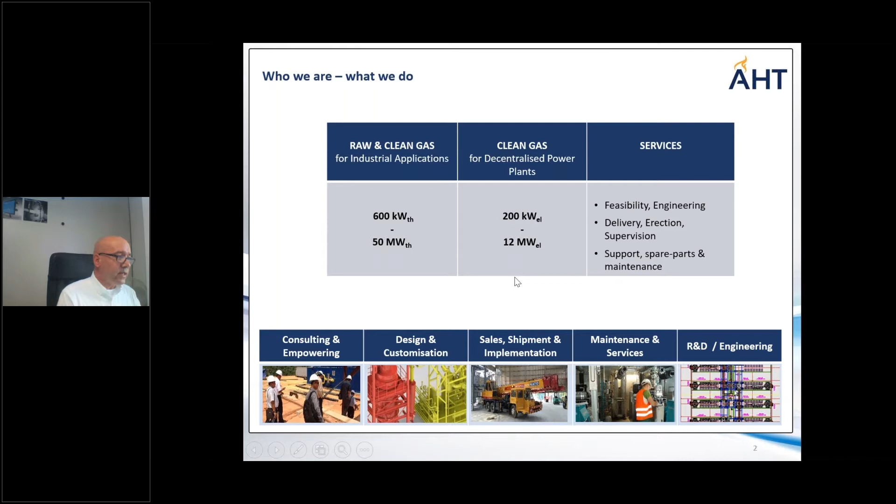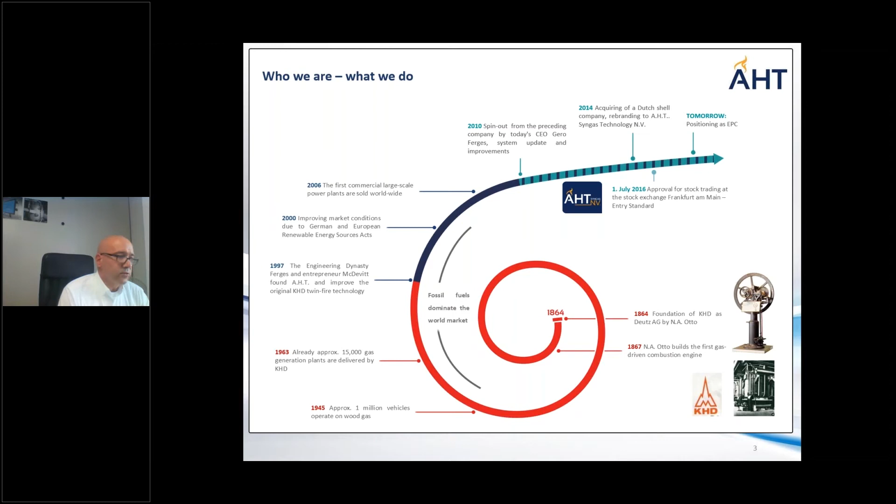Thank you. A short glimpse on our history. We actually stem from Klöckner-Humboldt-Deutz, which invented the so-called twin fire gasification principle. The father of our CEO, our owner, took the technology after AHT was dissolved. We basically spun ourselves off from the original AHT and translated the technology to the demands of the current century.

Thank you. This is what a typical setup could look like. So the centerpiece is the so-called twin fire gasifier, what that means I will explain a little bit later. We apply a gas cleaning system, in this case a wet gas cleaning system, as we can purify the gas to the best possible extent so that you can either use syngas constituents or use it with turbocharged high-efficient gensets or CHPs. The water is circulated, so we clean it up and put it actually back to the production cycle.

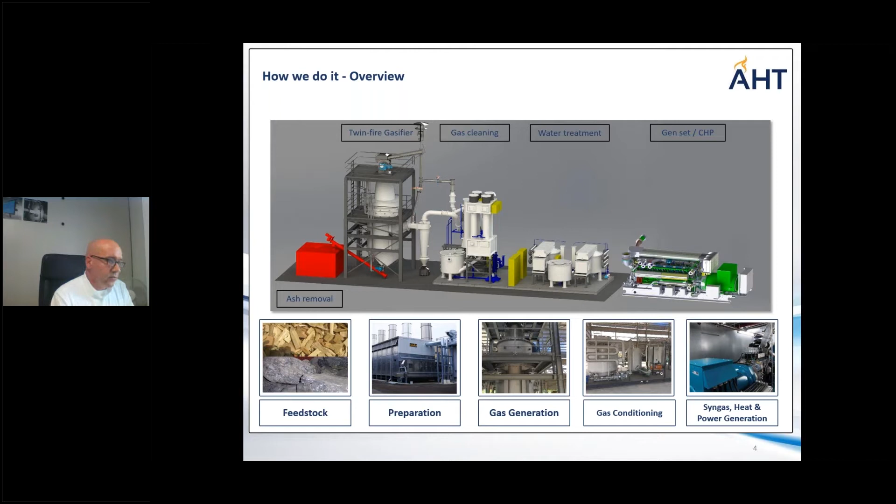Next slide, please. So this is what actually twin fire means. In fixed bed gasification, there are two types of gasifiers: the so-called updraft gasifiers, where the gas flows against the biomass flow, and the syngas is stripped off in the upper part of the gasifier. So you have a quite high tar content because it goes through the ungasified part of the gasifier, but at least a low ash content. The downdraft gasifier does it the other way around, and this way you have a low tar content but a high ash content, as the syngas is stripped off near the ash zone. So what we do is combine both - we have an updraft and a downdraft, a co- and counter-current flow, and the syngas is stripped off in the lower middle part of the gasifier. This way we have a low tar content and a low ash content, and the material is completely gasified so that we only entrain pure ash. This is also important because we also address waste reduction. Next slide, please.

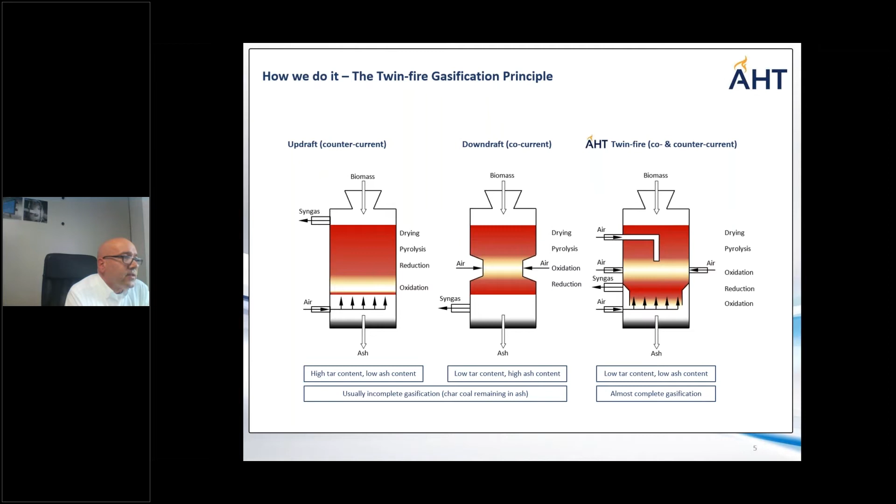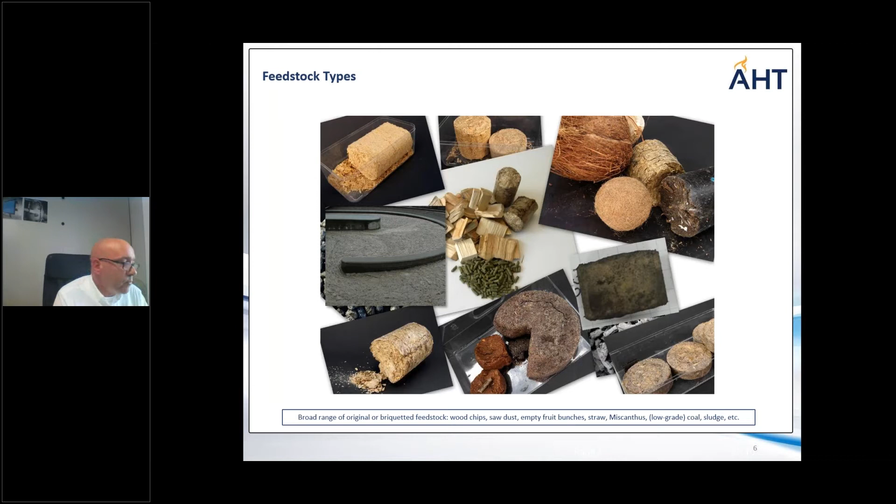So here you can see what types of feedstock we like. Basically we need a coarse structure, so in the easiest case these would be wood chips, but we can also use harvest materials in briquetted form - this is, for example, of interest for the palm oil industries. And we can also use sewage sludge, by applying hydrothermal carbonization. This turns any high liquid biomass, also sewage sludge, or manure or digestates from biogas plants, into a hydrochar. This hydrochar can be gasified, but it can also be used as a soil improver.

A relatively new project of ours is the hydrogen separation from syngas. It is an advantage that we already have hydrogen in the syngas, up to 15, up to 30%, depending on the technology, so we only need to separate it. This means we need considerably low energy, and we can actually generate the hydrogen where it is needed. Next slide, please.

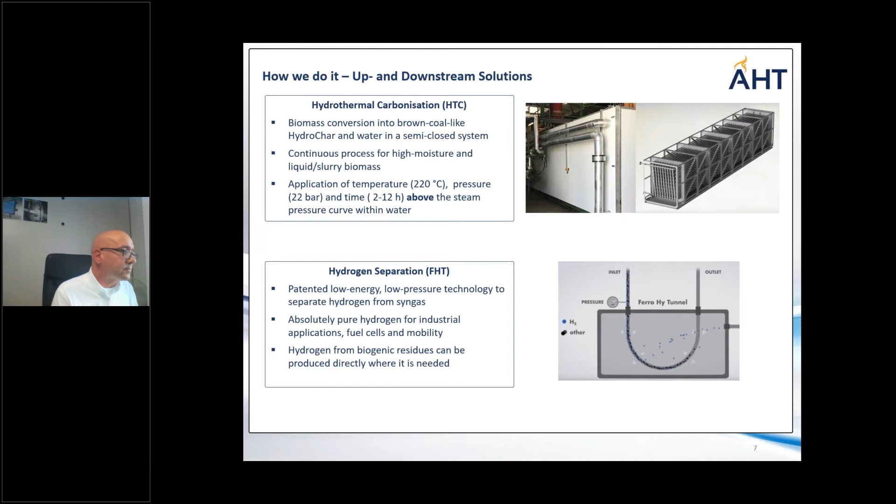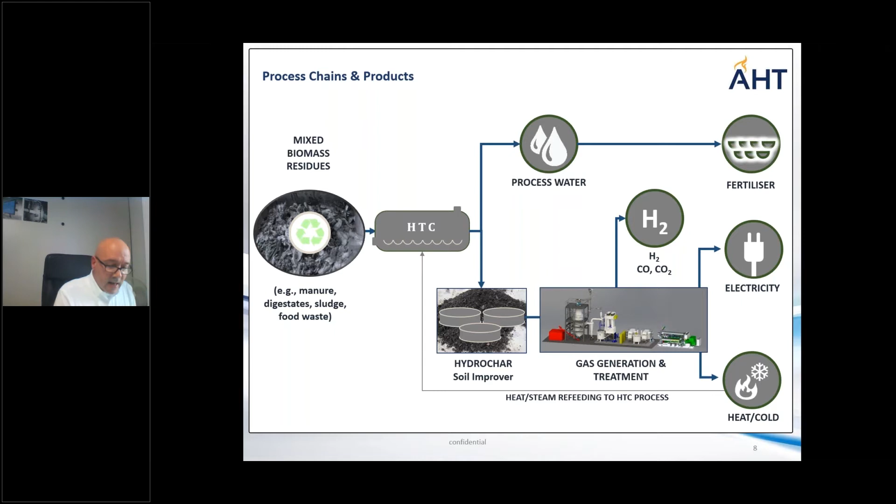Then, of course, we have the opportunities to separate the hydrogen. We can separate CO, we can separate carbon dioxide - these are of interest for chemical industries. And of course, we can generate electricity and heat, and from that heat, of course, cold.

So to whom do we offer? The center is smart cities. We already heard today that there is an issue with volatile energy carriers like wind and solar. Our plants are a perfect completion, because we deliver baseload energy, and our plants can also go down with the output or go up again, depending on how the other energy carriers behave. As I said, we target chemical industries in need of a clean syngas.

Wood processing industries, farmers, cooperatives, production and manufacturing who need high process temperatures and process heat. Food and beverage industries bring their own waste, so they can practically have no expenditures anymore for heat. Also important in Indonesia, independent power producers, and sewage sludge plants who also want to have a CO2 neutral and energy neutral energy balance.

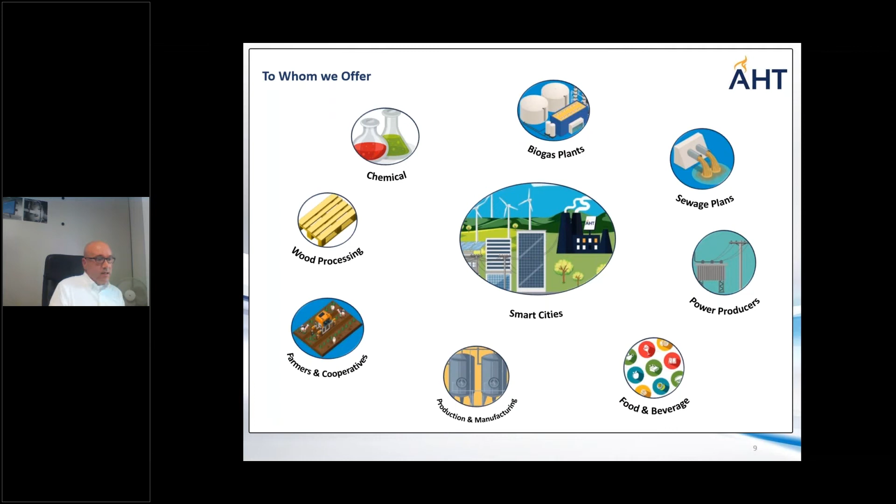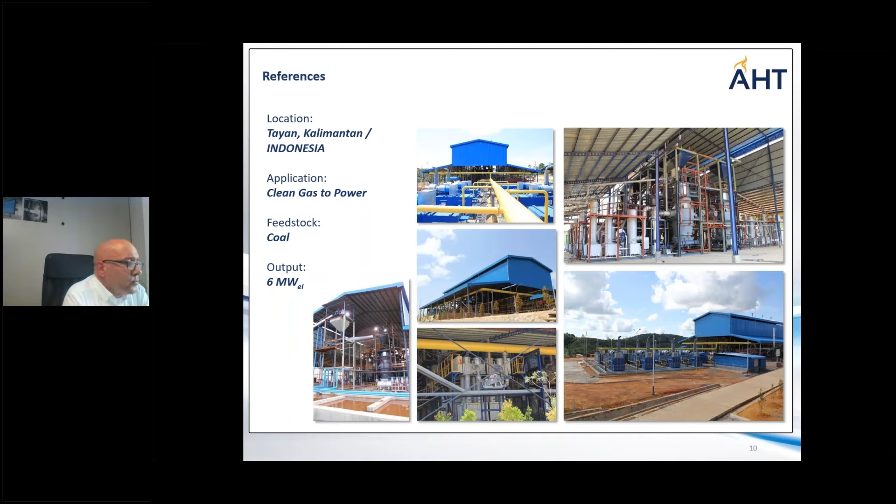We are already in the market. We had two projects. One of these projects was in Tayan, Kalimantan - a coal-fired power plant at that time, and the output was 6 megawatt electrical.

This is an example of an industrial application. It was also fired with low rank coal here. Output was 40 megawatt thermal, and it was used to produce iron ore pellets.

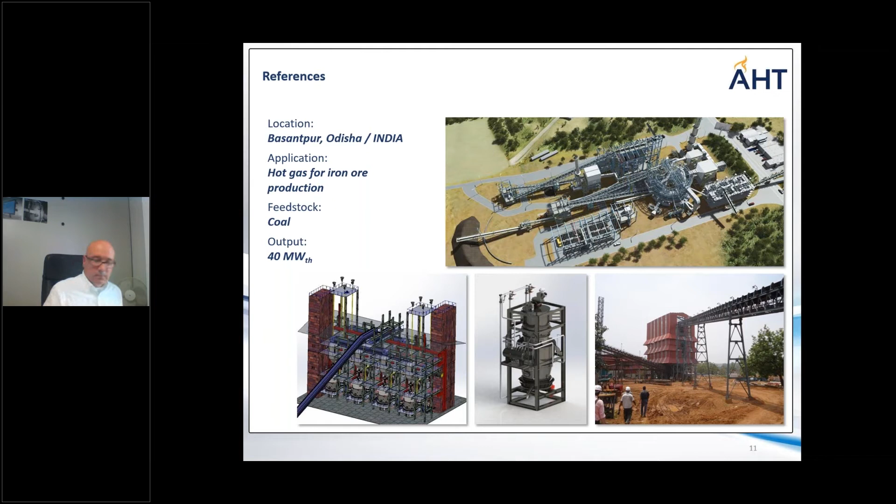This is one of our latest projects and references. It's located in Switzerland, and it combines the hydrothermal carbonization with clean gas heat and power generation. We are in the midst of commissioning this plant. Unfortunately, due to the pandemic, we could not travel, but now the works have resumed.

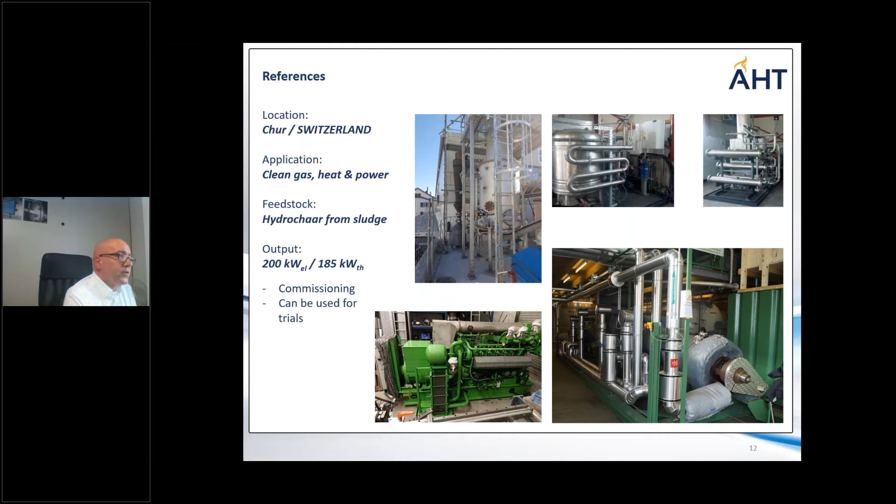This is an example we installed last year. It was a pilot plant, 150 kW, and it was also a hydrochar plant. The owner of this plant produced, by his own developed technology, a kind of hydrochar.

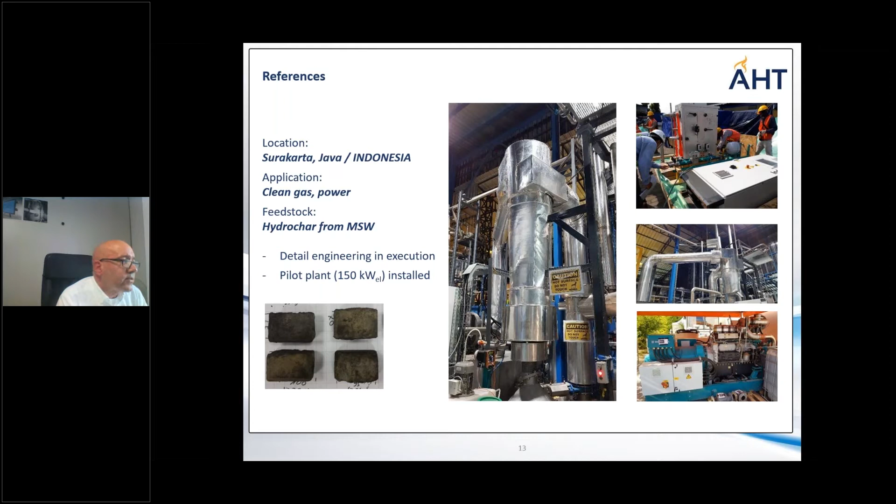This is an example of a grid-connected installation in Japan. It runs flawlessly since 2015, and 800 kW electrical are produced and given to the grid, serving 2,000 households. If you look at the picture on the left-hand side, you can see a hotel above the plant - so it's in direct vicinity, which shows how clean such a plant actually works. There is no noise, there is no odor, otherwise the hotel obviously would not exist anymore.

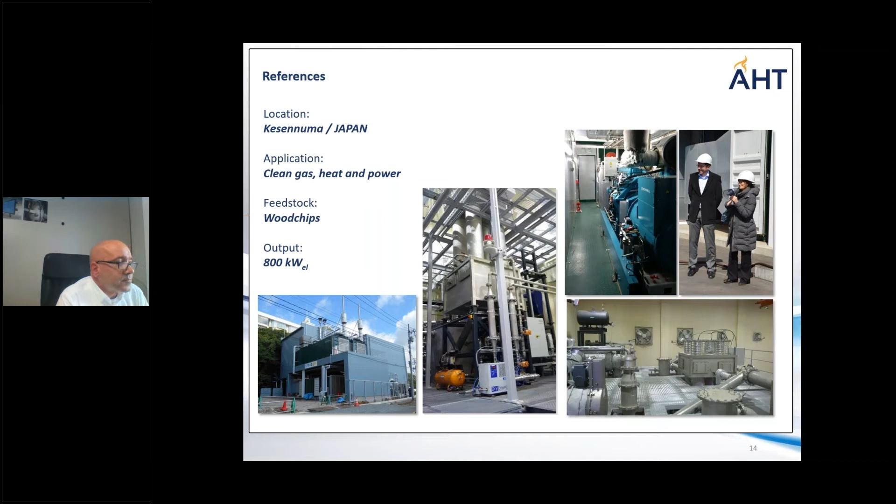Can you check under audio whether the audio is working? Your audio settings perhaps have to be activated. In the menu you see audio, maybe just check if it's on no audio. Okay, maybe try switching off the camera, that might help. Try switching off and on the microphone once, maybe that helps already, because if I do it, it seems not working. Let's see now.

Can we switch to other, and then we can have Mr. Gunther back. Can you hear me? Yeah, now, no? Yes, very good. Yes, now we can hear you. I have restarted the system and now it seems to work. Sorry for that problem, but at the beginning it was working.

We are located in the south of Germany, also in Wiesloch, around 80 to 100 kilometers south of Frankfurt. So my slide moving is also not working, maybe someone can move my slides. Stefan? So we are located in the south of Germany, also in Wiesloch, it's around 80 to 100 kilometers south of Frankfurt. So next, please.

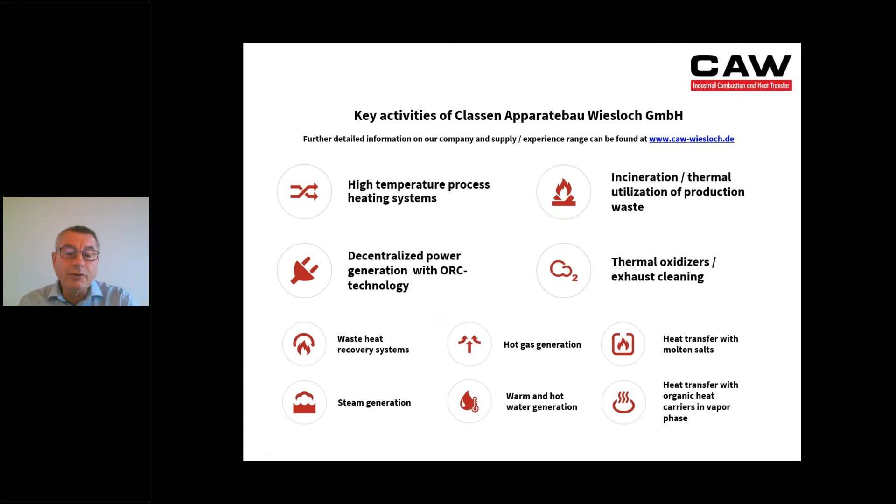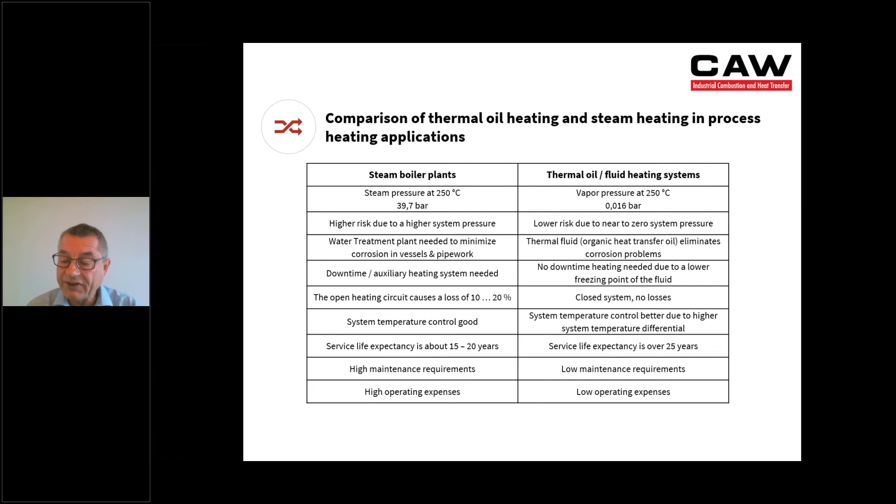Our key activities are manufacturing and supply of high temperature process heating systems, typically for process heating at high temperatures. If we are talking about high temperature, we are talking about temperatures above 150 to 300 degrees. Also above 300 degrees, process heating is possible with special fluids and molten salt possibilities. The benefit of such a thermal heating system is that we can operate at high temperatures up to 300 degrees without any pressure inside the system. For example, if we have a system temperature of 250 degrees, we would have in steam systems around 40 bars, and the thermal heating system is still working without pressure.

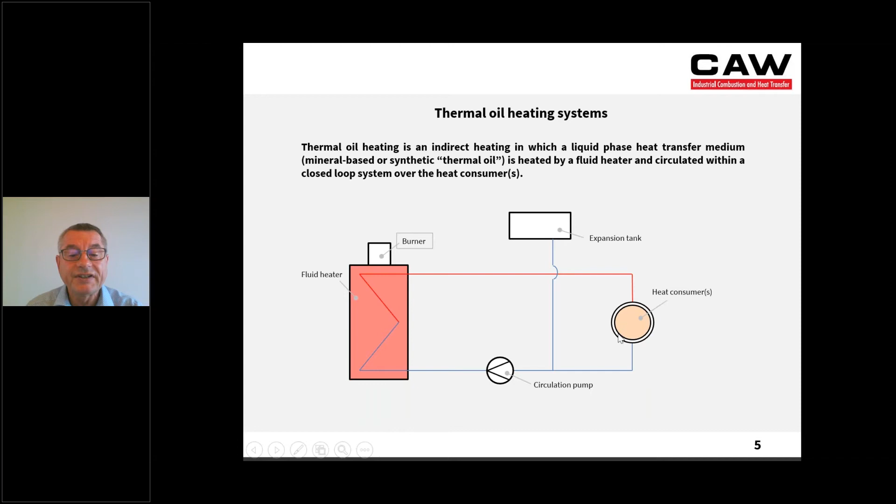So next slide, please. This is a principal drawing of such an indirect heating system. We have at the left side the thermal heater, which is fired by means of a burner, or it can also be used with a biomass firing system. We have a pump below, which pumps through the circuit. We have the expansion system and the heat consuming system.

Next slide please. As fuel, we typically use for the simple systems fossil fuels like natural gas, light fuel oil, or also heavy fuel oil. Typically, if we talk about efficiency, we combine this with so-called economizers, which use the energy of the flue gases to give it back to the combustion air and achieve highest efficiencies up to 96% efficiency. We also heat up our systems with biomass, with grate firing systems, and also with production waste like liquid fuels, gaseous fuels is possible depending on the process, which is coming from the process, and also electrical heating is possible.

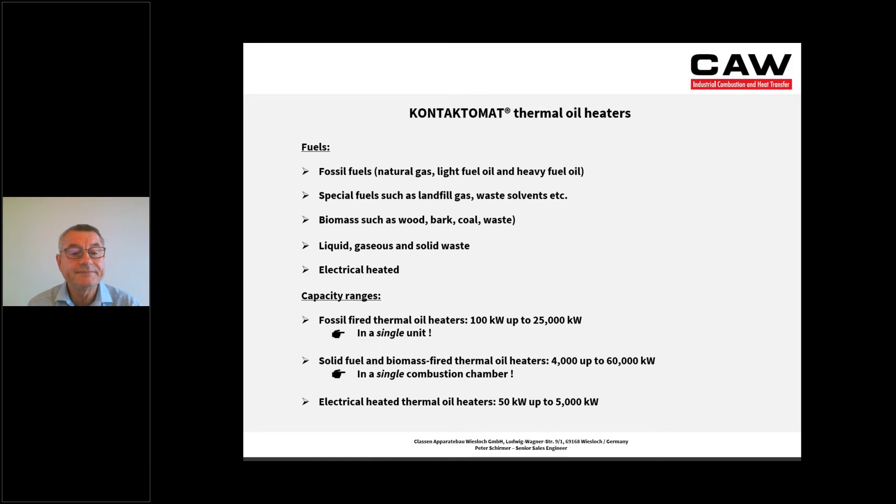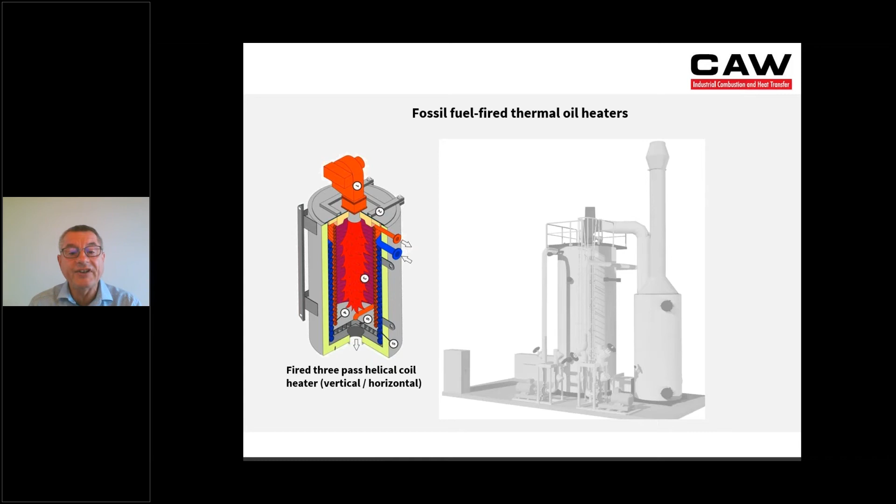Next slide please. Here, the left side is such a direct fired thermal heater with a burner on the top, and we can see in the middle of this heater such a tube coil, which forms the combustion chamber. At the right side, we have such a heater combined with an economizer.

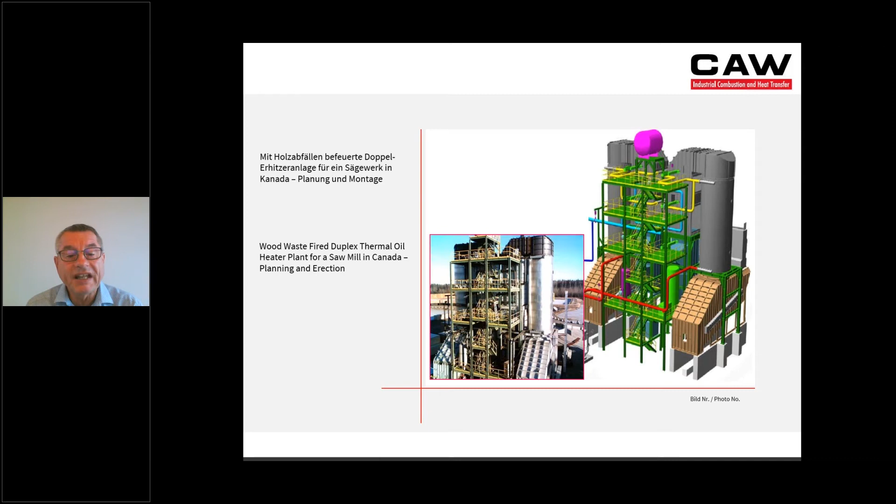Next slide please. This is a heat exchanger showing - this was a heat exchanger, which is installed in our biomass firing systems to extract the heat from the flue gases. Here you can see a biomass firing system in a sawmill in Canada, from the pre-planning and then after erection.

Next slide please. This is this heat exchanger, which is installed in such biomass heating systems. The benefit of such a bare tube heat exchanger is that it can be cleaned very easily, for example, by a shot cleaning system.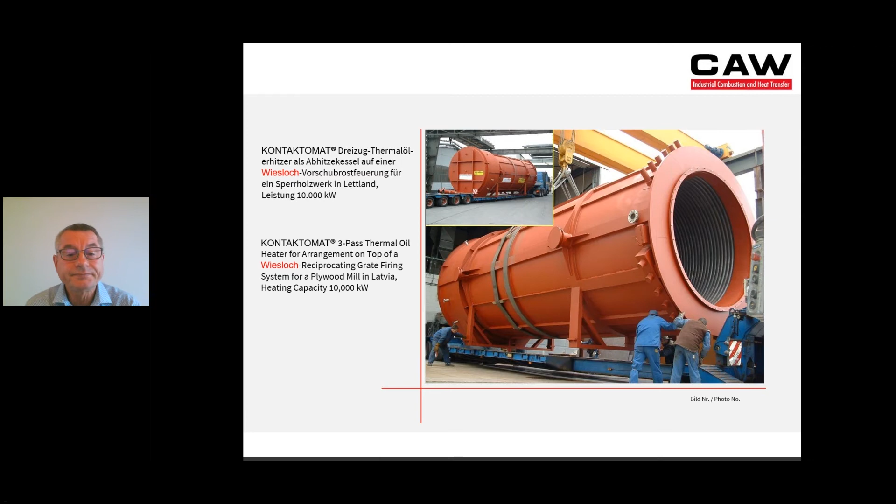Next slide please. This is a small direct fired thermal heater in combination with indirect steam generation. The benefit is that we have such an indirect steam generator, which is not fired. It's handled from official side only as a pressure vessel, so there is no need by law to operate this as a steam generator because it's only a pressure vessel.

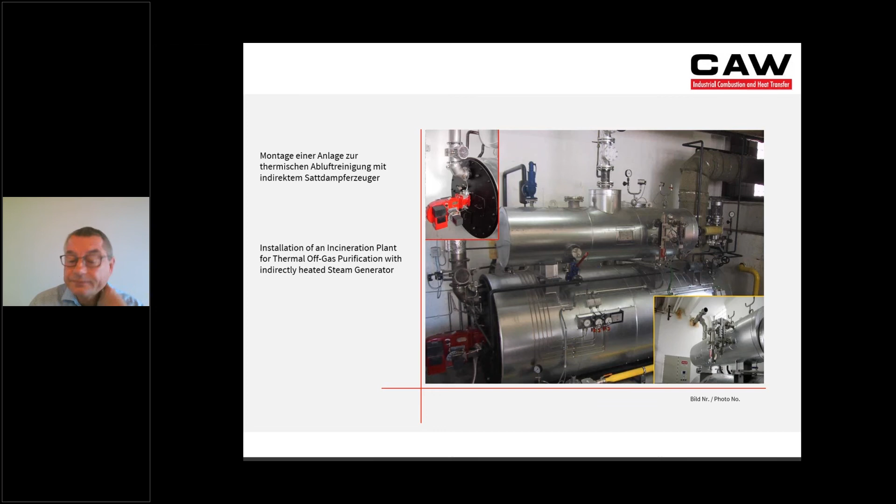Next slide please, one minute to go Mr. Gunther. Yep. Here's some references, and we can see here the left side heater with highest efficiency and lowest NOx emissions. Next slide please.

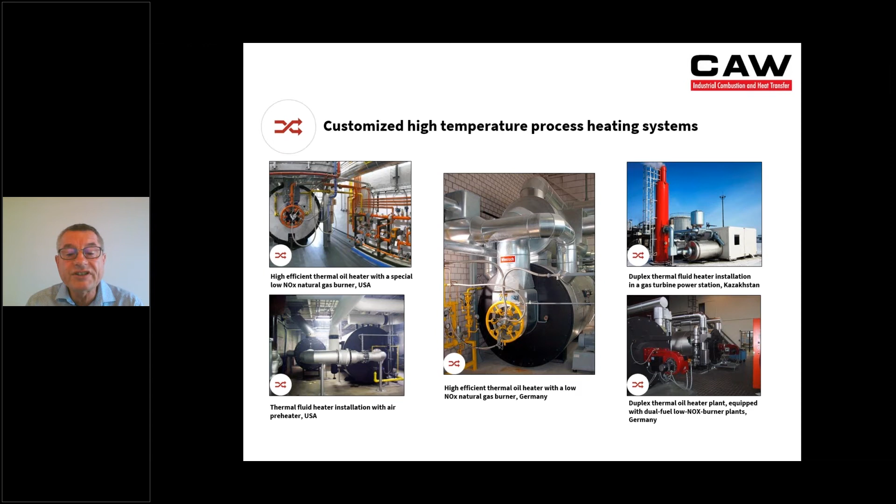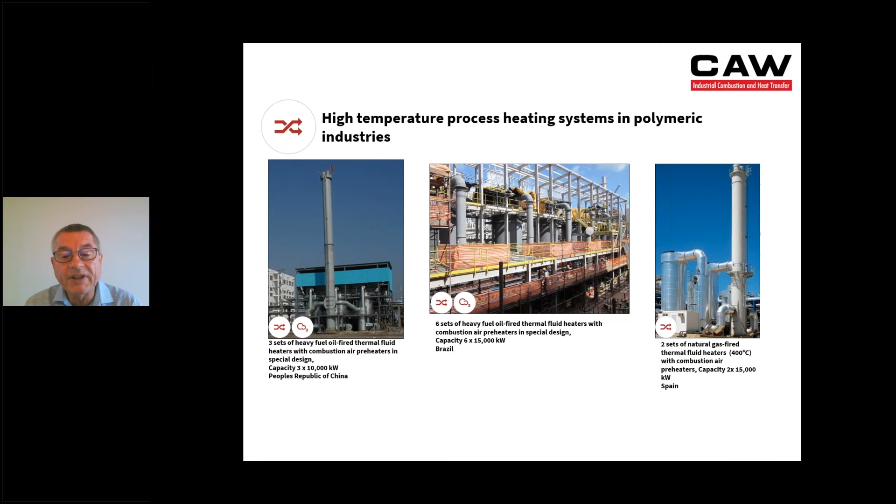Example of installations with air preheating. The left side is installed in China for a PET plant, and the right picture is a power plant, solar power plant in Spain, it's operated for 400 degrees. And here we have some references in refineries where we use refinery gas and residues from the refinery to generate heat. Next slide please.

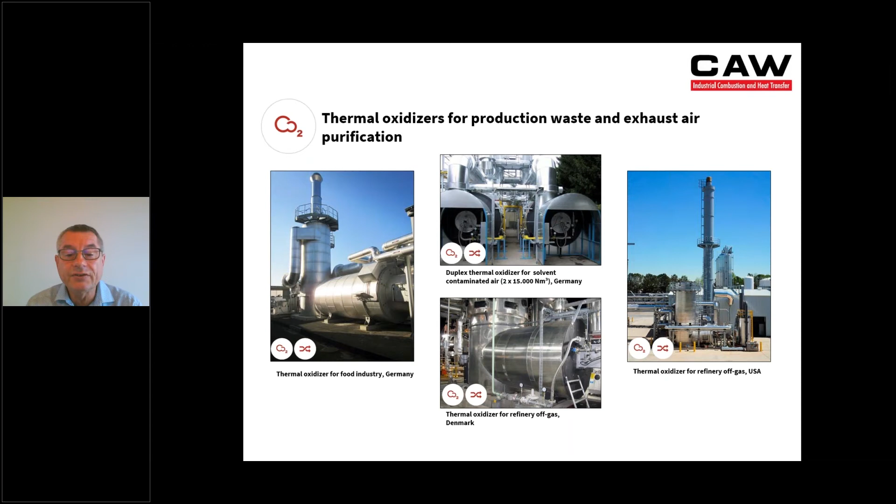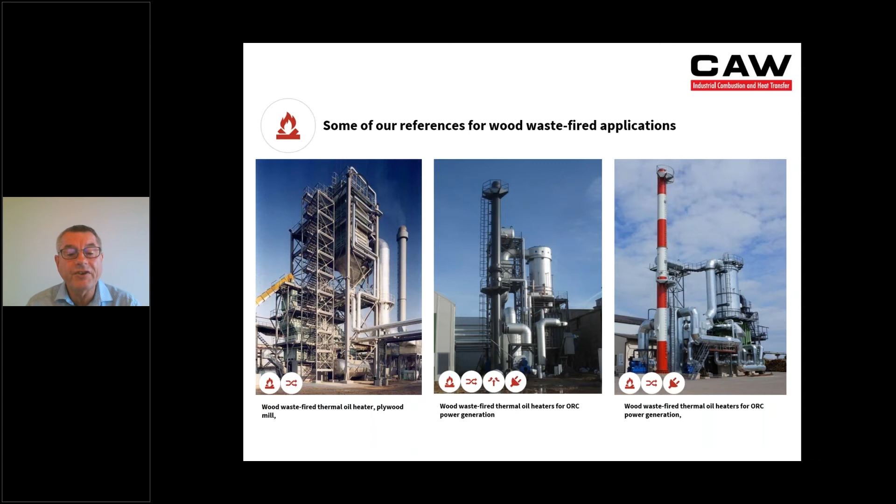Some biomass installations in combination with power generation, with ORC power generation. Next slide, please.

Thank you very much for your attention, and I wish you an interesting conference.

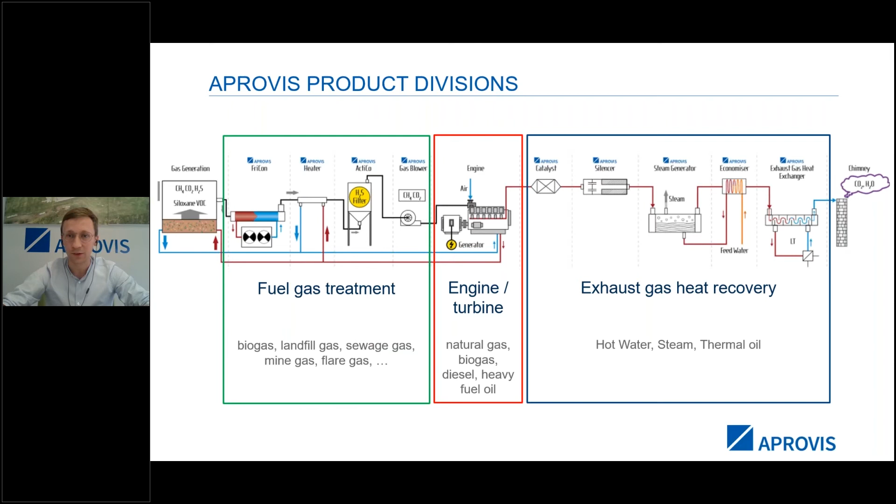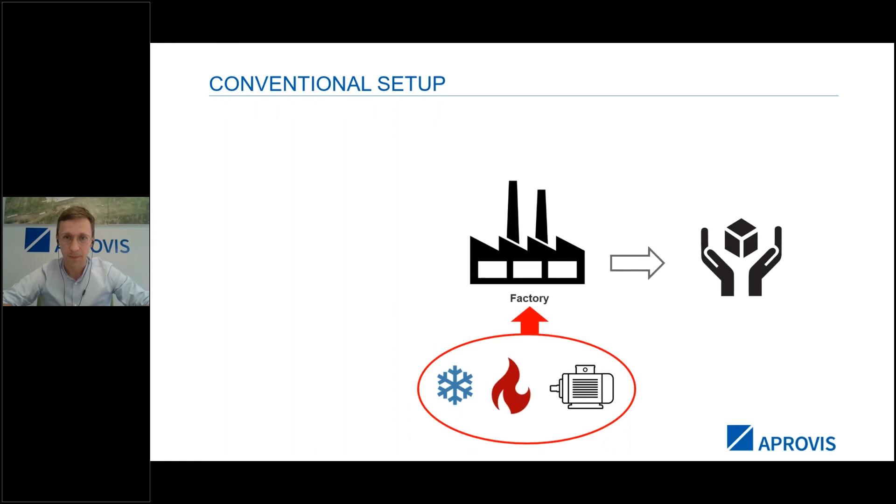So we will focus with the next slides on this energy efficiency setup with CHP. But before that, I would simply show you the conventional setup so we are all on the same picture. We take the example of a factory producing a certain product. To produce this product we need electricity to run pumps and conveyor belts, cooling power to cool the factory or the product, or thermal power, as we heard before, for a thermal boiler or thermal circuit like hot water, thermal oil, or steam.

For that, in a conventional setup, we have electricity coming from the PLN electricity line, and a gas supply—or it can also be coal, any kind of fuel—to actually run the heat source, the steam boiler or the thermal oil boiler.

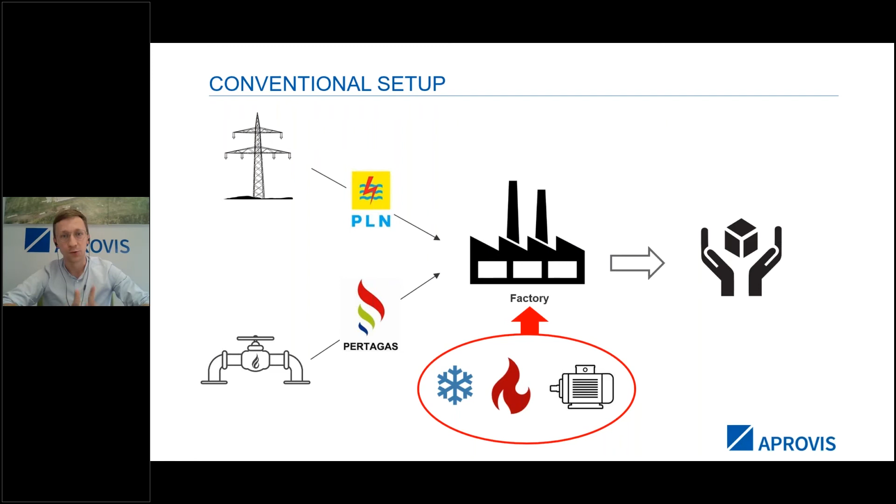Now compared with the CHP setup on the next slide, we see a combination. We still have the same factory with the same output of a certain product, which is the focus of everything. But now we have a combination using a gas engine or gas turbine, producing electricity, shown here in the yellow arrow on top. Then at the same time, out of the heat recovery, we can produce cooling power, steam at a certain pressure level, or heat to support the existing heating circuit with thermal oil or hot water. It can also be incremental power—if we talk about pure electricity production, even the exhaust gas heat or waste heat can be utilized to increase the overall electric production.

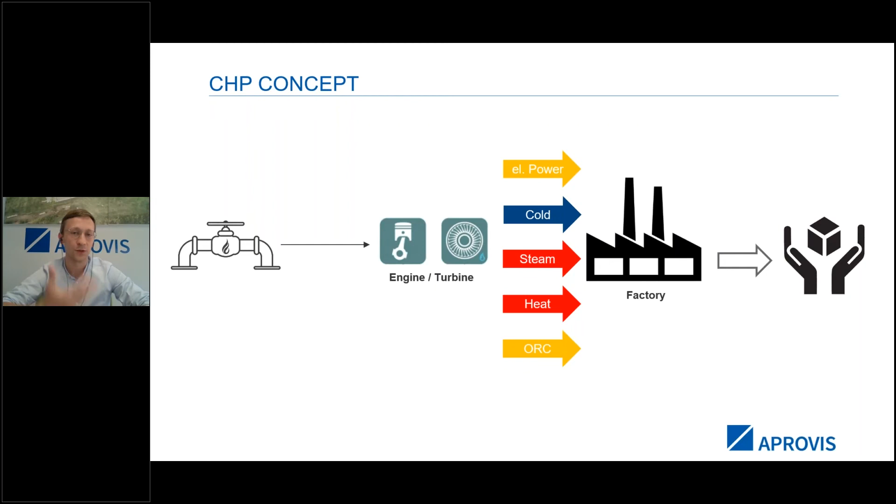So all these options are on the table. We are an equipment supplier, so I'm simply showing you what is possible, not that we have all this in our scope of supply, but we can assist you to evaluate what is suitable for your approach, your project, or your plant, guide you through the beginning of this evaluation, and in the end serve with our equipment, which has proven itself worldwide in several cases. Next slide, please.

Again, now the CHP example in reality, a simple one. To round up the picture, we see the example of a gas engine, a certain size, let's say 1 megawatt or 2 megawatt. This gas engine is usually running on natural gas and producing electric power to supply to the factory.

We have hot exhaust gas coming out of this gas engine, and it could be dumped directly to the environment. But we are here to learn about energy efficiency, and state-of-the-art proven technology in Europe, America, and Australia is actually to utilize this exhaust gas heat in simple equipment like a heat exchanger, no additional firing necessary. From this exhaust gas, in combination maybe with jacket water coming from the gas engine, there are several waste heat sources to take this waste heat and produce, from the same original fuel source, additional hot water.

If we talk about glove production, which has risen by 600% now due to the COVID situation worldwide, the glove production needs hot water at a certain level, 140 degrees. We can provide that with this kind of equipment and at least support the existing system. Why are we doing this? Because the energy bill will be lowered. We can substitute a certain amount of hot water with this system. So it's a combination of heat and electric power, and it can also be cooling power, whatever is needed.

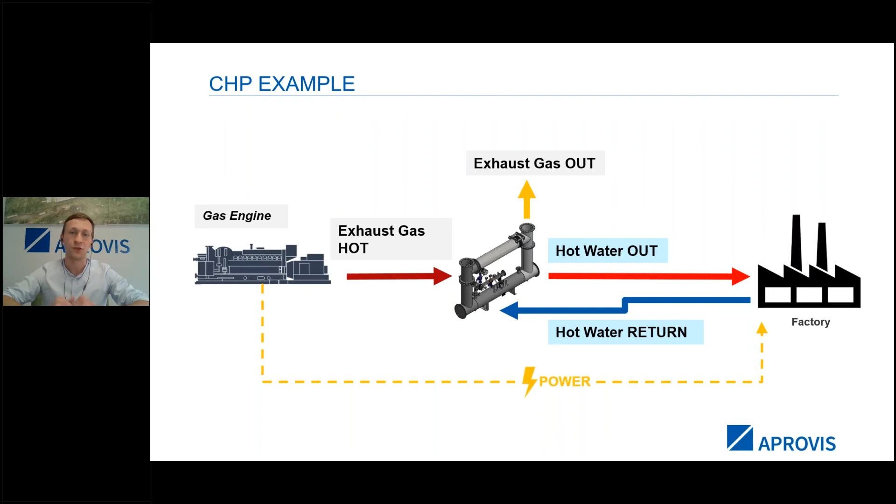The motivation behind this, why energy efficiency is shown in this table, where we see the standard energy efficiency, the general efficiency ratio for certain types of power plants. We have the typical thermal power plant up to 40% electric efficiency, meaning 60% of the initial fuel going to that plant is dumped to the environment. Gas engine generators come already with 40 to 50%. Now we talk about energy efficiency measures we take additionally, like the combined cycle, to raise that percentage further.

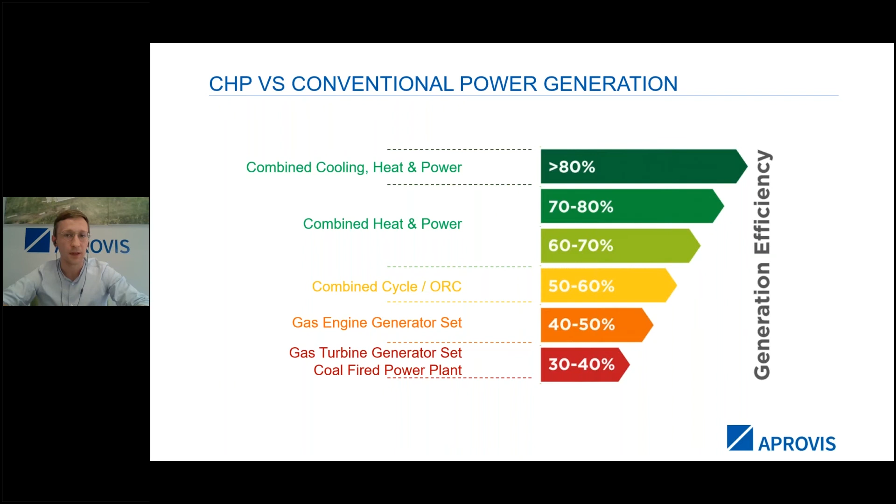Or if we want to reach the really green zone, the higher level of 60, 70, 80%, we need to talk about combined heat and power, CHP. This is what is behind this table, to have a broad picture of where we end up with efficiency, to simply get more out of the fuel that you have to pay for on a yearly or daily basis. Next one, please.

To summarize the product range: as I mentioned, gas processing and gas heat exchangers is what we have for the green production, for the biogas production. We have the emission control equipment and steam generators, but purely the heat recovery solution, not the direct fired one. Same for the exhaust gas heat exchangers.

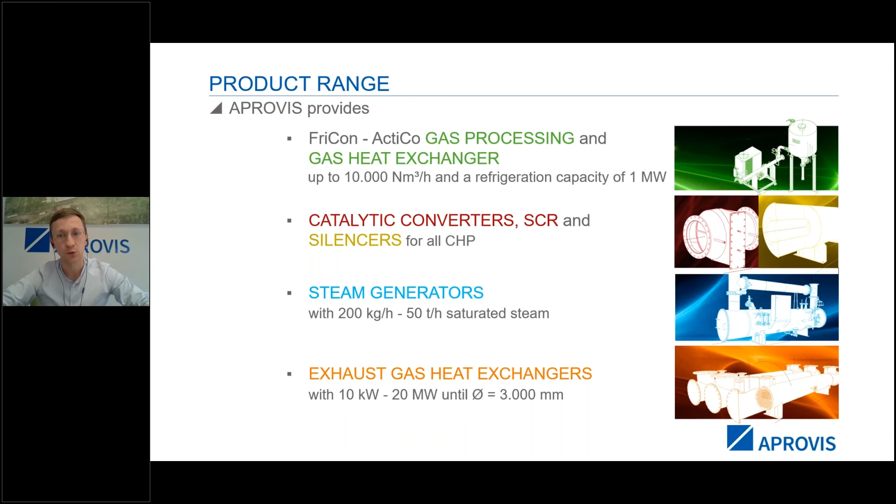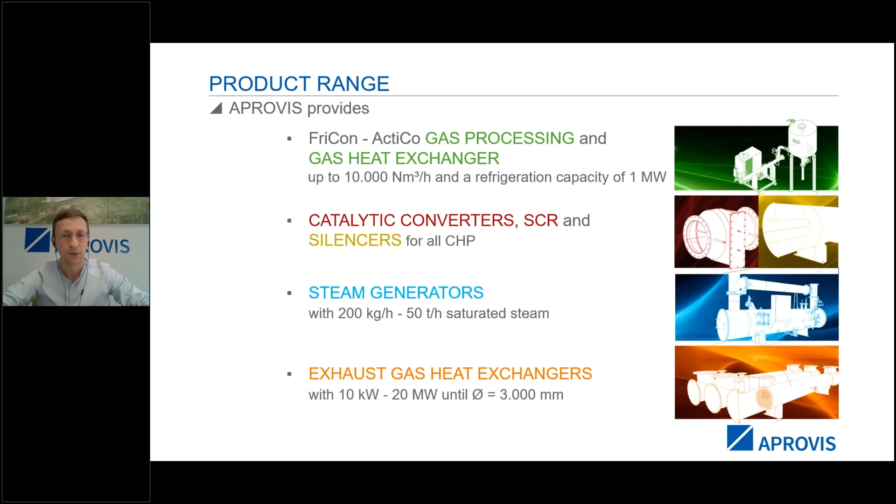What I would like to convey is a message: whenever you have a gas engine or gas turbine project as an IPP, an EPC, or engine distributors, these are our partners to work together with, to sort out the most efficient setup and the best setup in terms of capex for the project. So we help with ROI calculation, we help to get a nice broad picture of the project, and then connect with certain partners to move on. Next one, please.

With that, we have worked together for years with all the big names in engines, from engine manufacturers. You see Rolls-Royce, Wärtsilä, Jenbacher for sure, MTU, MWM, Caterpillar, all these brands. We have a close relationship and supply directly to these engine manufacturers as an OEM supplier.

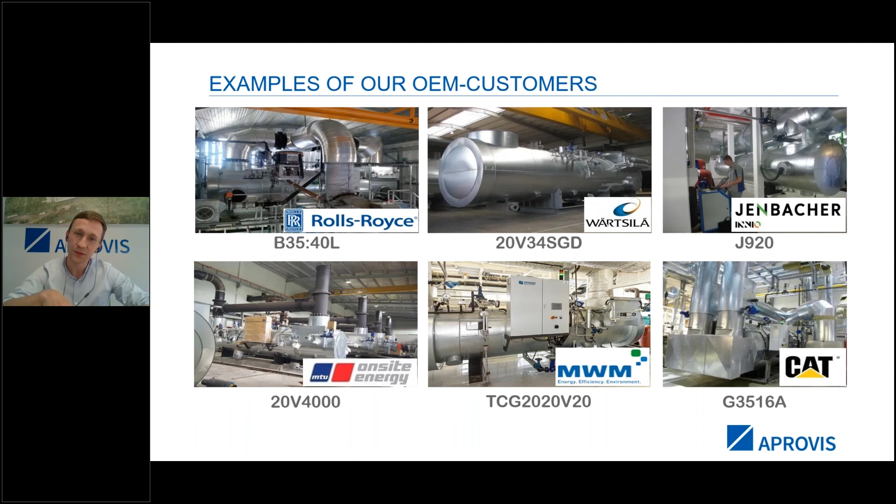Also, after-sales is managed from here. So we are close, and please contact us for any inquiry. And with that, I would like to hand over to the last presentation. Thank you very much.

Thank you, Niels. It's an overall picture of your capability and product lines, and hopefully it is going to grow faster in Indonesia.

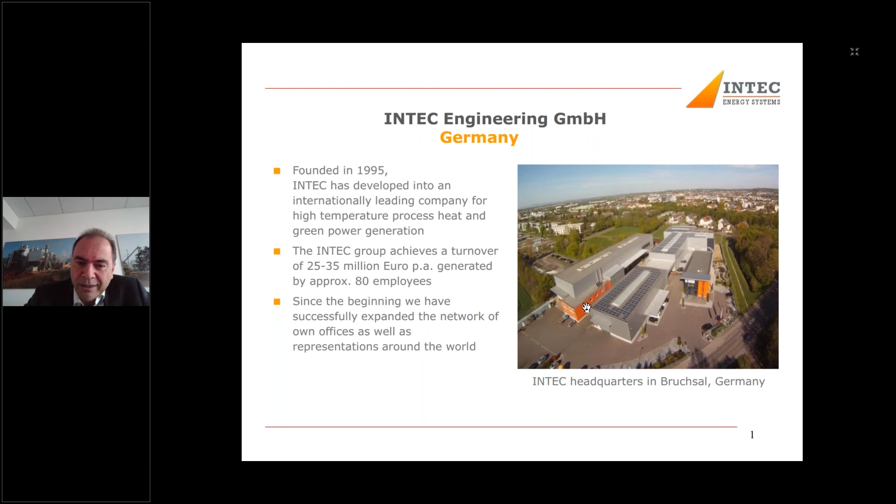Our business is to provide complete solutions from heat to power. It's a quite big range of many different products, and beyond this, from heat to power solutions, which we will see later in more detail. We are also offering the opportunity for sludge drying. This is getting more important in Europe, the opportunity to dry and incinerate sewage sludge from water treatment.

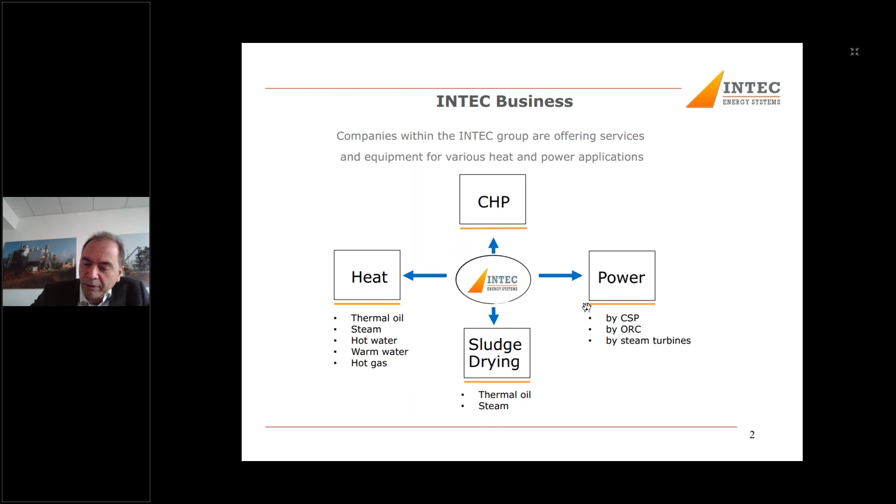INTEC has been working worldwide for a long time, so we have many installations around the world, several with thermal energy supply, and we have participated in many power generation projects across the world, mainly in Southeast Asia.

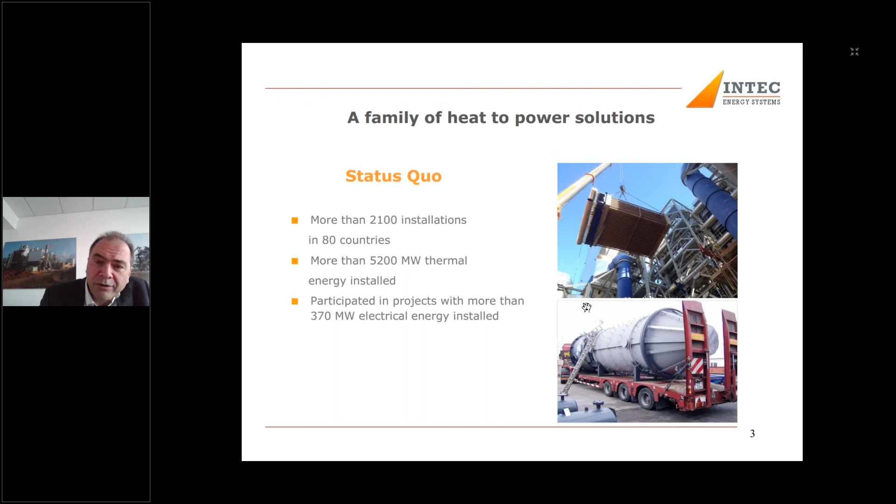What we do is complete design and engineering for such plants, very often in joint development with the customer to see exactly what the needs of the customer are. We are happy to do the complete engineering around this. The manufacturing of the key components is done at our production facility in Germany, but for many different projects we can also offer local supply, as done with many other customers in Indonesia, and turnkey installation is also in our reach. All these deliveries are accompanied by supervisors for the installation and service engineers to do commissioning and after sales support after startup of the plant.

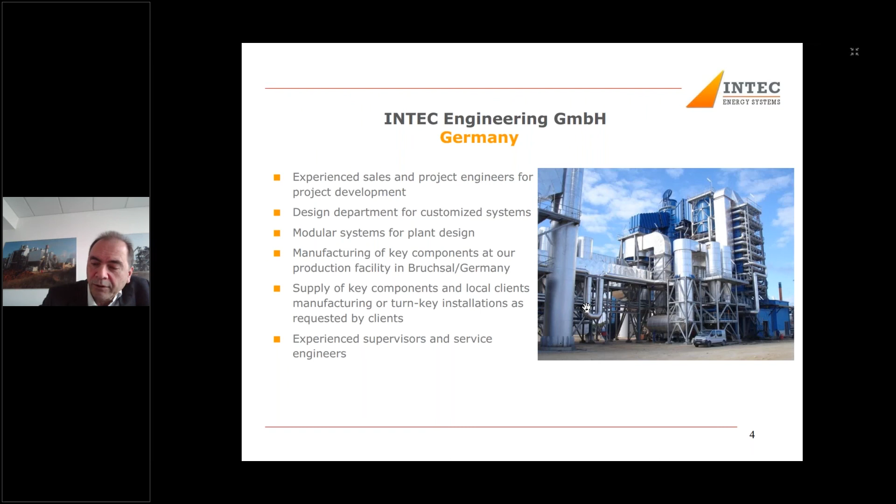The range of products includes thermal oil heaters in many different orientations. The picture shows our so-called three-stage rocket design with a very small footprint, incorporating the thermal oil heater, the economizer, the stack, everything with a high efficiency up to 95% and capacities of 30 megawatts. As an example, one of the largest heaters of this type is installed in Gresik near Surabaya for a customer from the oleochemical business, with a capacity of 24 megawatts in one single unit.

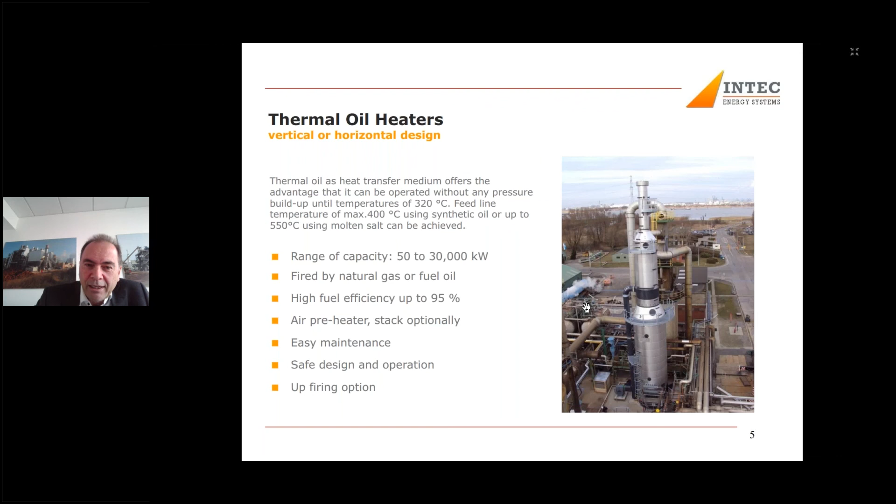Also interesting products are the waste heat recovery boilers. We have different technical executions for this: it can be a one-pass radiation heater, multi-pass radiation heaters, convection sections with tube bundles as shown in the picture, 3-pass heaters, many different applications. The media we work with is thermal oil at temperatures up to 400 degrees, steam, hot water, or very often also hot gases after their own combustion system.

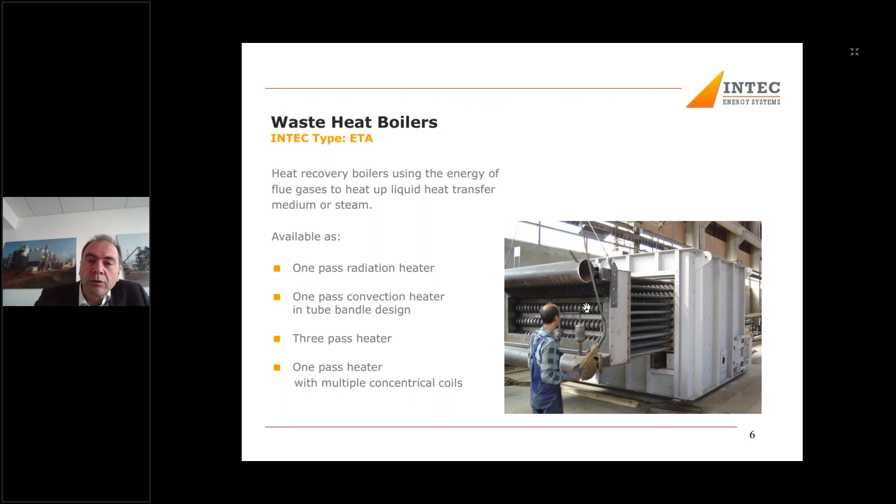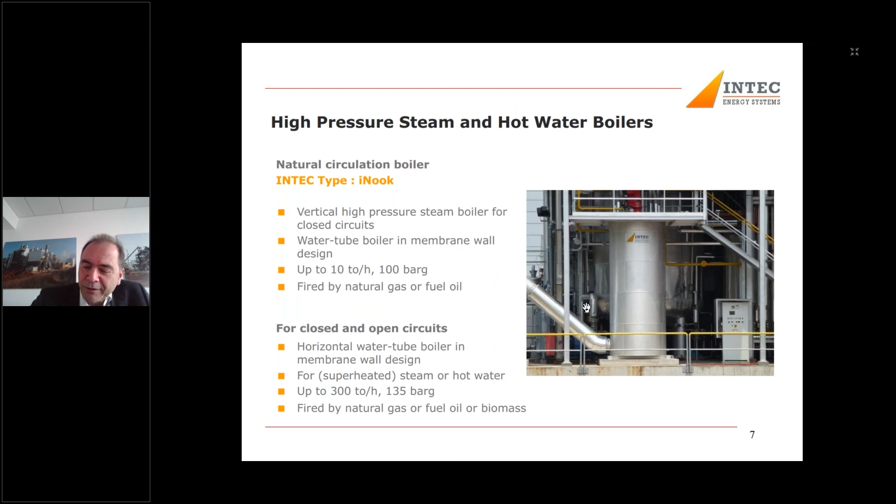Important for the oleochemical business, which is the palm oil business, also very strong in Indonesia, are the high pressure steam boilers. Here we have large customers in this business like Sinarmas, Musim Mas, and Wilmar. The high pressure steam boilers, especially the closed circuit steam boilers, we offer with a pressure up to 100 bar and capacity up to 10 tons. The standard ones for open systems exceed this capacity and achieve much higher capacities up to 300 tons or more with 135 bar. All these units can be fired by natural gas or fuel oil, or in combination with a biomass combustion system, which we also offer.

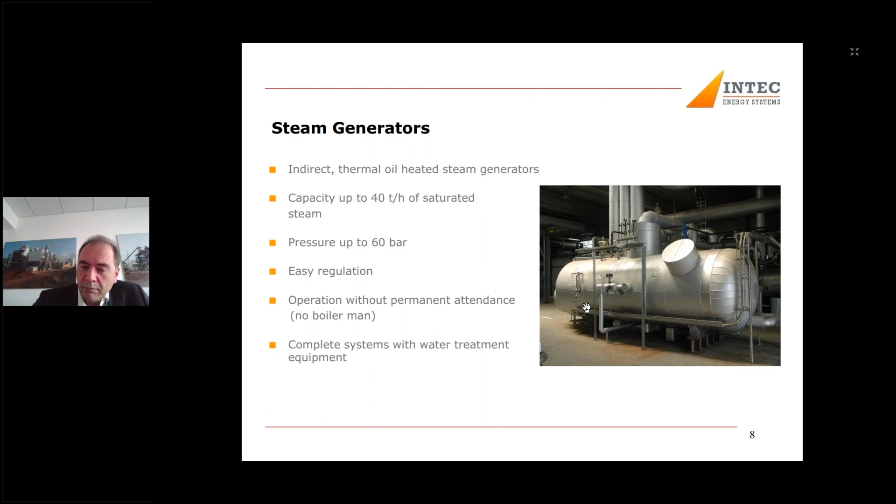Steam generators are heated by thermal oil. We have installations in Indonesia, in Sumatra near Medan. The capacity there is up to 40 tons per hour and the pressure goes up to 60 bar, with very easy regulation and no attached firing system.

We have seen the equipment fired by natural gas and fuel oil. Of course, we also have our own combustion systems for biomass. This can be a reciprocating step grate designed especially for biomass.

This is very important. We have been offering our energy plants for 20 years in Southeast Asia, with capacity up to 100 megawatts. We work with many different fuels, which can be very poor quality, up to 100%, even 180% moisture, and many different biomasses. The latest project uses palm oil trunks to utilize every waste from the production opportunities.

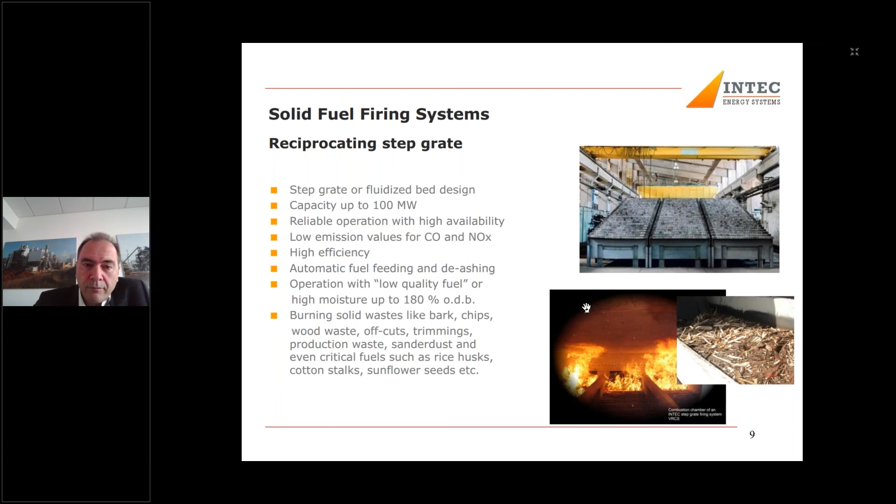In parallel to this, we have fluidized bed combustion. We are happy to offer both systems from one hand, so we can choose the most suitable technology for our customers. The fluidized bed combustion system is often used also for coal firing, where we have thermal oil-fired coal heaters operating successfully in Southeast Asia, and also sewage sludge incineration systems.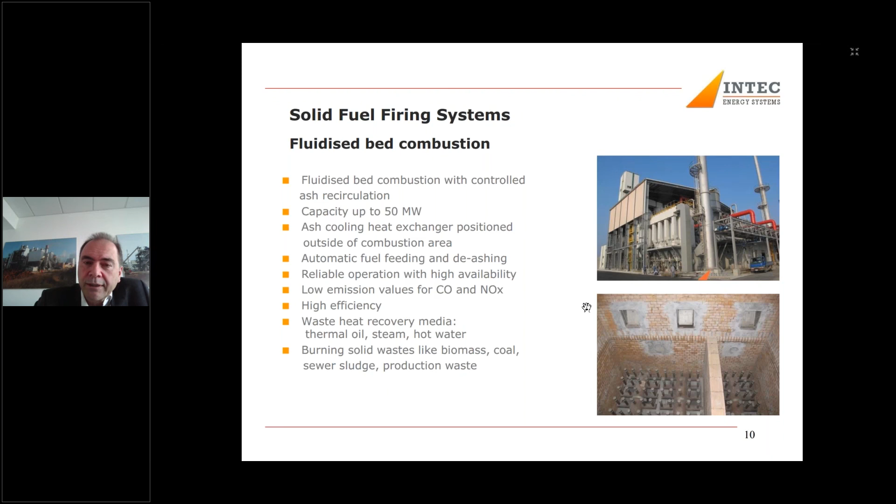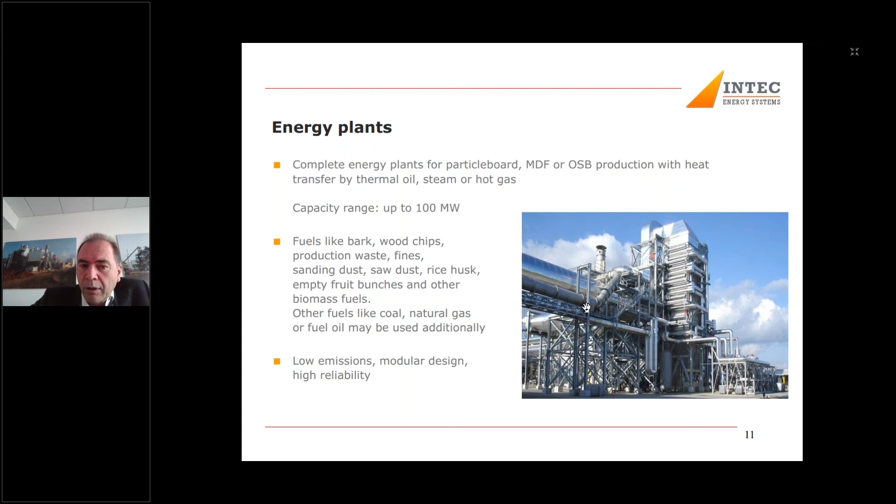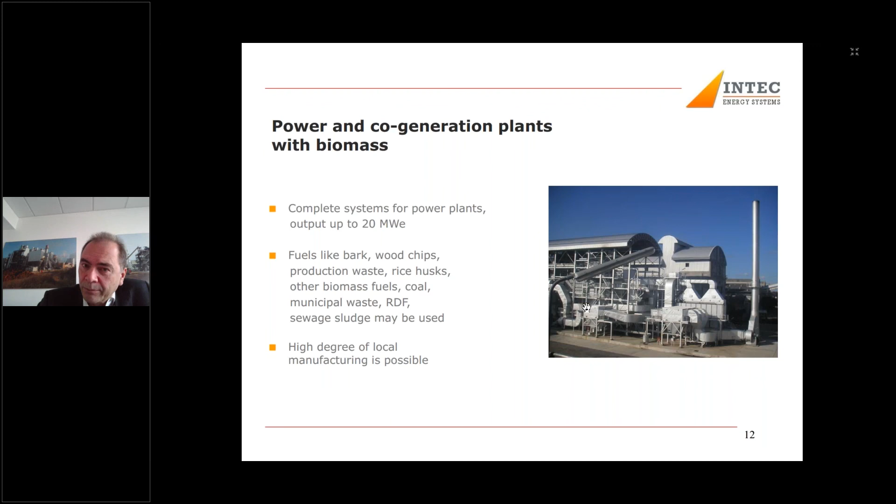Besides this, we have the power generation cogeneration plants. Most installations are running in Southeast Asia, in Thailand, with capacity up to 20 megawatts electrical. The fuels here are also very different - can be wood chips, bark, very often rice husk from the rice mills, but also different biomasses. It also goes towards RDF and municipal waste, more and more active now in Indonesia. We have many projects offering waste-to-energy plants to remove municipal waste from the landfill. This is the opportunity to do either a standard power plant with electrical power generation, or also a cogeneration plant to supply steam for the manufacturing process.

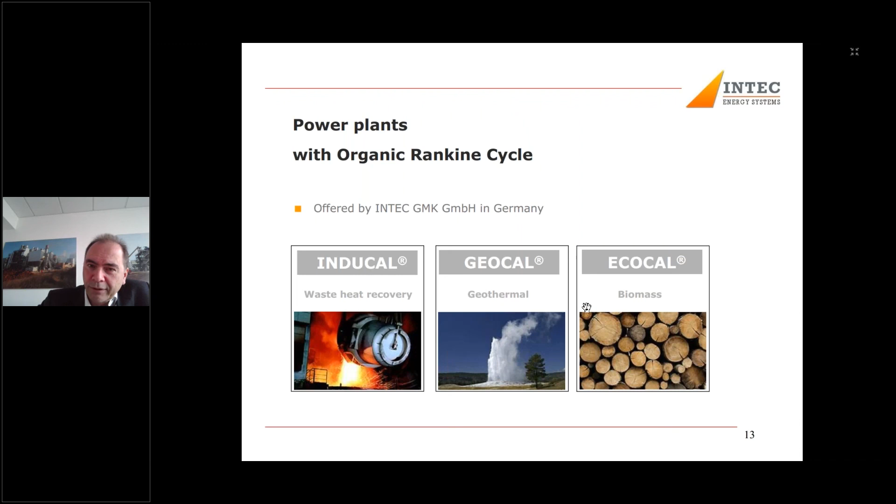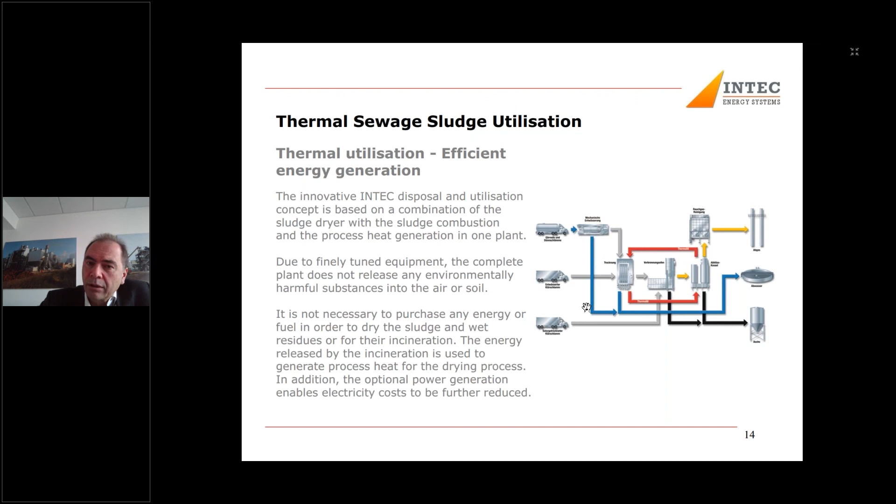For this we also have our own products to dry the sludge. We have high temperature sludge dryers using hot oil or steam, which due to the high temperature help us overcome the problem in drying, the sticky phase of the sludge. We overcome that very fast without any problems, and can move easily into the drying of the sludge and preparation for incineration.

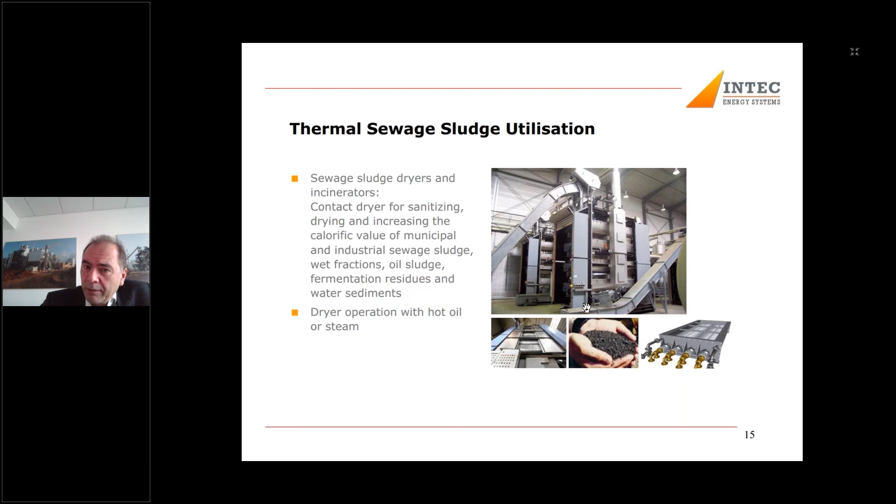When receiving this presentation, you'll find further slides in the back with many references of our installations. Time is not allowing us to go through that now, but you will find it in this presentation. Thank you very much, and looking forward.